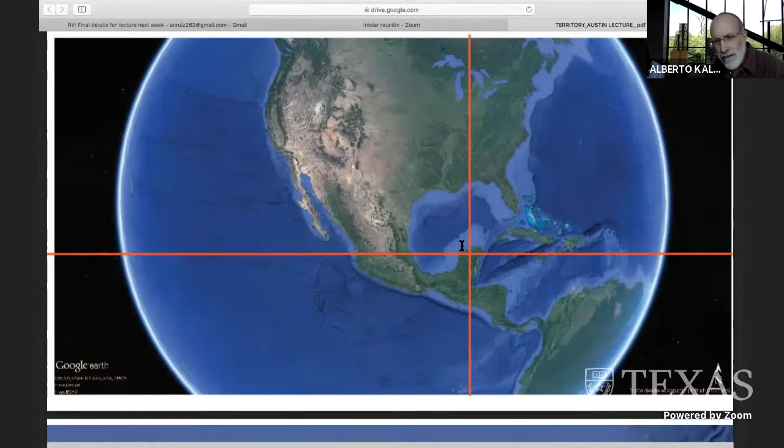So we're going to start with a project here in the Yucatan Peninsula. You know very well the territory because you are not far away from there, you're our closest neighbors, Texas. And you can see immediately by the colors of the image, you have the feeling of the territory. You can see, even though it's a very small image, where are the mountain ranges, where are the deserts, where are some rivers, even where the ocean is deeper, where there are tectonic faults in the planet. So we're going to approach the Yucatan Peninsula.

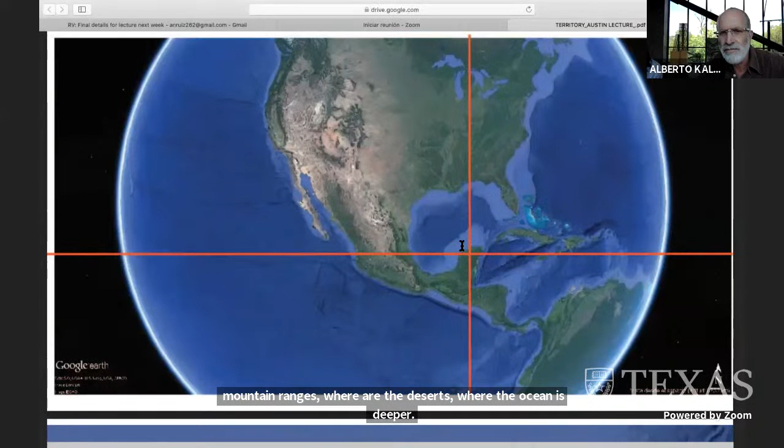How do we do that? Okay. We're going to start with a little project somewhere around here. We were commissioned to do a restoration of an old hacienda from the beginning of the 19th century.

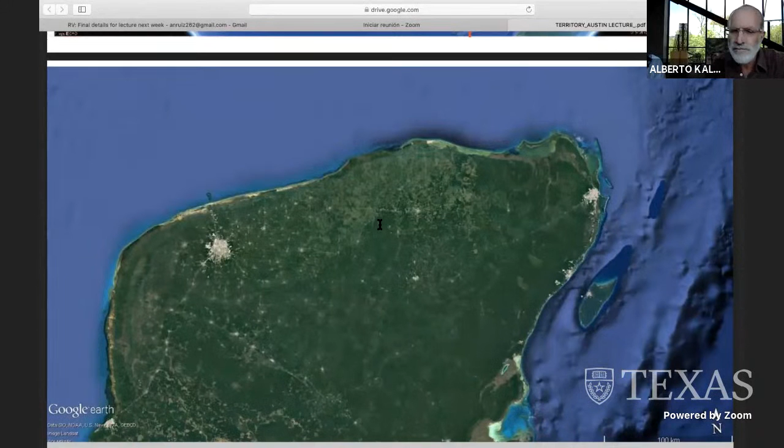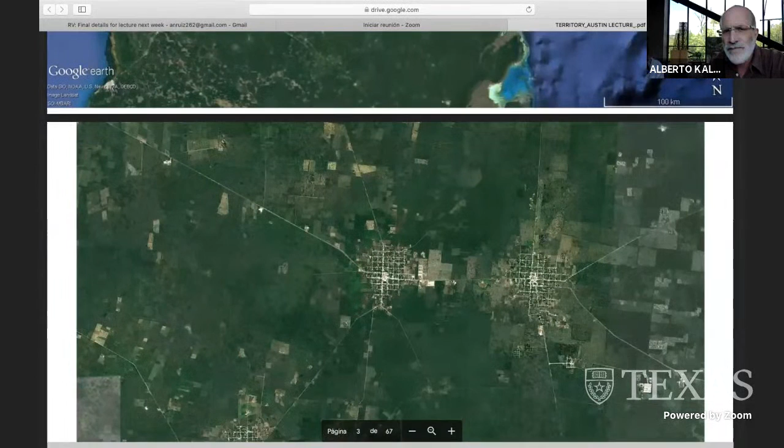Hey, where is that hacienda? Was it here? Vale, okay. Well, anyhow, by doing that hacienda, we discovered that the hacienda was abandoned for more or less 80 years, 60 years, and there were huge trees in the hacienda. But the rest of the landscape was devastated. There were no huge trees, there were like kind of abandoned agriculture areas.

All the inhabitants in the area thought that landscape was a low forest, not the high forest we imagine that somehow happened there years ago. So by detecting those huge trees, we realized that if those huge trees were there, probably that was the image of the peninsula long time ago. We did the research, and our observation was correct. It was a very powerful forest with huge trees, but very few were left.

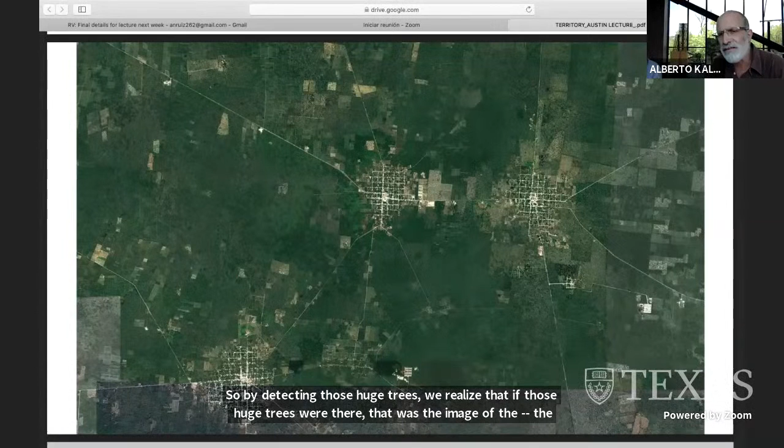So we thought that could very easily be restored. Even though 80% of the peninsula's big trees are gone, we can very easily recover them because the water table is not so deep. There is an enormous amount of water 10 meters below ground, and the conditions are given for the large jungle, for the large forest.

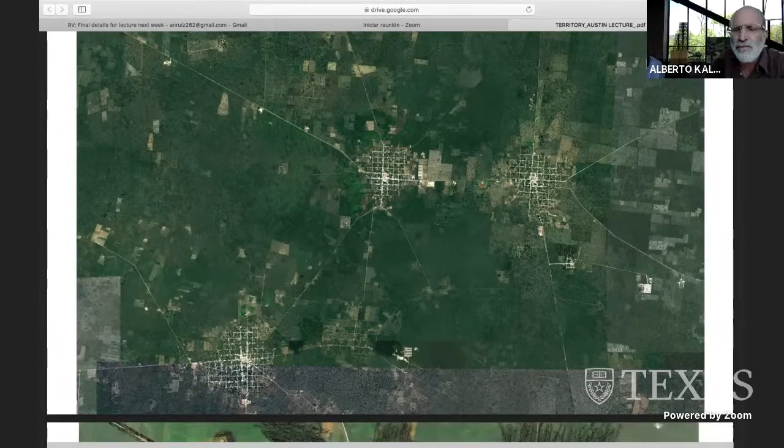So we started to design, to imagine first how to encapsulate the urban areas, how to protect them in order not to spread out. Something that we have seen in many parts of Europe: the cities are perfectly well defined. The limits between city and forest, or city and the working fields, the agricultural fields, are perfectly established.

That doesn't happen in Mexico, but that's a very important thing to do if we want to have a better world. We have to establish very strong limits to the urban development, but also strong limits to the agricultural areas. By doing agriculture more efficient and cities more efficient, we can reconnect the existing forest. We can rebuild or replant the forest of vast areas. Of course, here we did it very fast with a color pencil, thousands and thousands of square meters in 20 minutes, but it's something that can be done, and it has to be done.

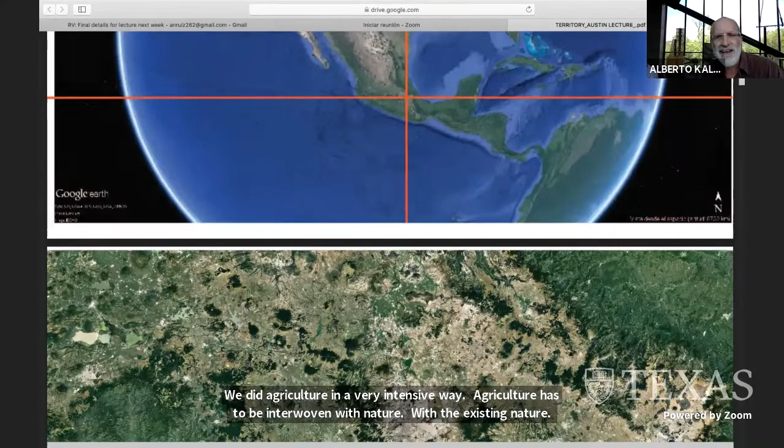If we move to the area of Mexico City, we can see here this is Mexico City, this is Puebla, this is Jalapa. But all this was a continuous forest from ocean to ocean, from the Gulf of Mexico to the Pacific Ocean. Along this range of mountains, there was a continuous forest that now is completely gone. We destroyed completely the forest. We destroyed all the lakes, we extinguished all the lakes. There was a huge lake in Mexico City, now it's gone. In Toluca Valley, it was full of water beds and lakes, a very complex system of lakes. Everything is gone. All the forest is gone.

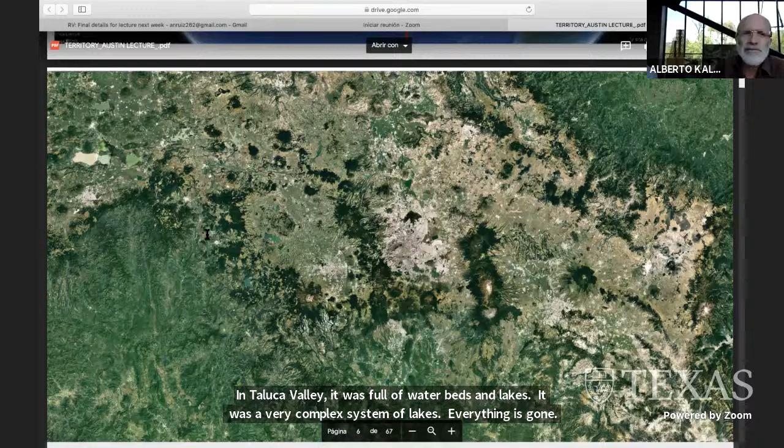Part of our task as architects, urbanists, planners, is to recreate, to redo all this devastation that we have done for centuries and centuries. In fact, in the 18th century, when Alexander von Humboldt visited America, he spent a few years traveling around.

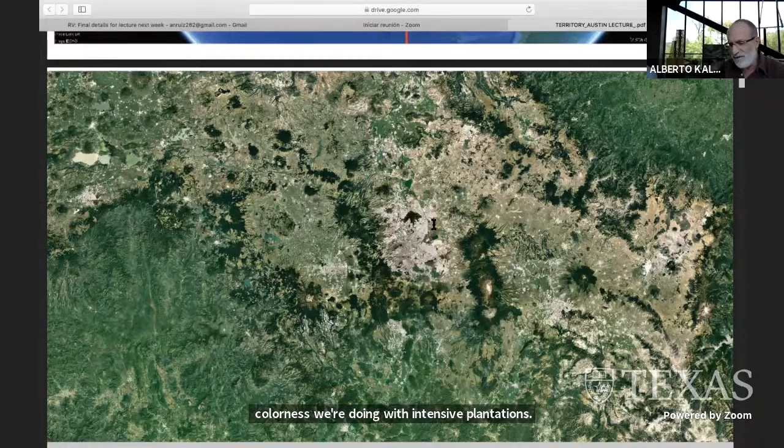He pointed out what the colonies were doing with intensive plantations. So instead of having agriculture for local consumption, the colonies did everything for global export. They used the land in a very intensive way, and they devastated it. They started the devastation, and that didn't stop until today.

Today in Mexico, we have a very retrograde government, no care whatsoever for the land, for the territory, but that's a very urgent work that has to be done.

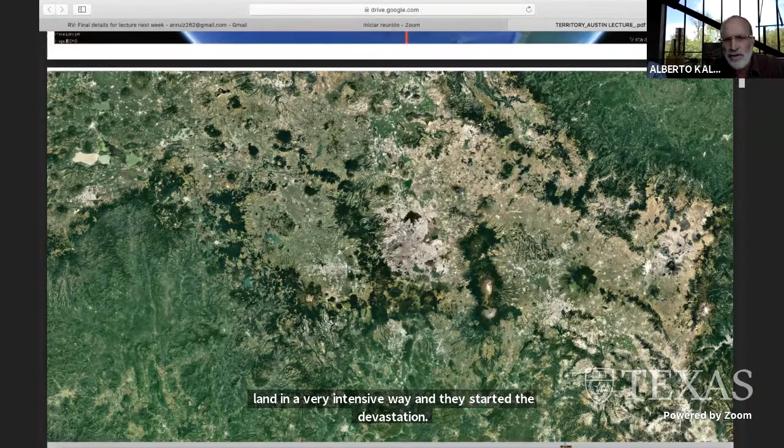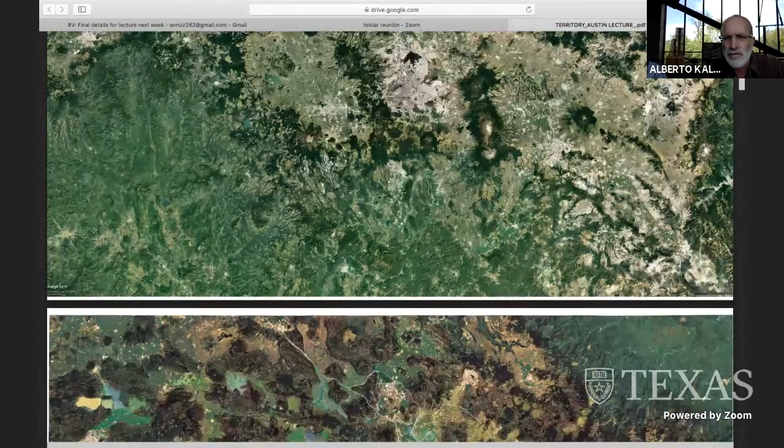So, as with the other image that we saw before, we did a series of interventions on these Google images. Here is an effort from the existing to the future vision, where all the forest is reconnected, all the agricultural areas are well-defined, and the urban areas are perfectly defined. The waterbeds, the water systems are recovered. It's a very important effort that has to be done in Mexico and in many parts of the world.

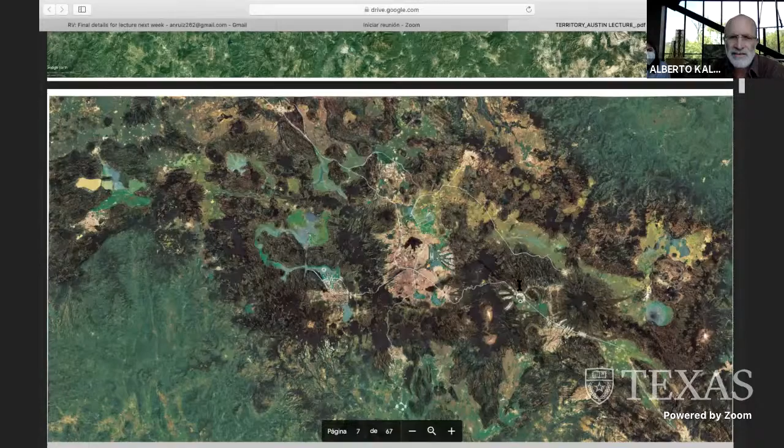Here we can see the huge Mexico City with the recovery of the areas of lakes that can still be recovered, the reforestation of all the ranges of mountains. The same thing happens in Toluca City, Toluca Valley, Puebla, Cuernavaca. It's an important task that architects have to get involved in.

If we zoom here, here is a zoom of the previous image. Here are the volcanoes at the east of the city, the cities around here. But here we see all the sprawling towns all over, and the deforestation. Not long ago, this forest was connected with this other forest, and now everything is devastated. Terrible devastation.

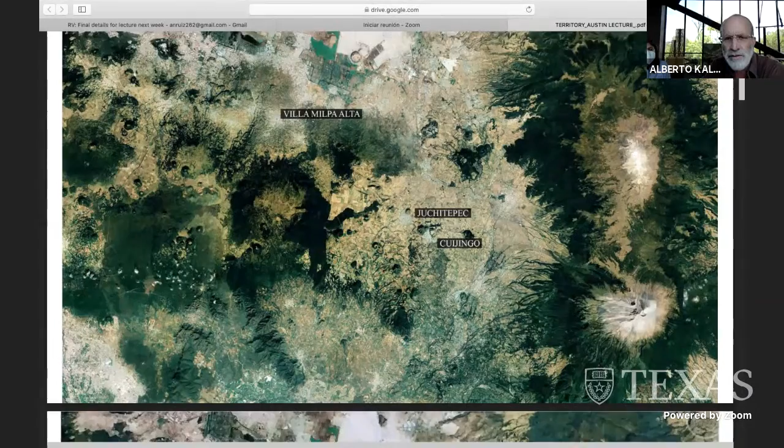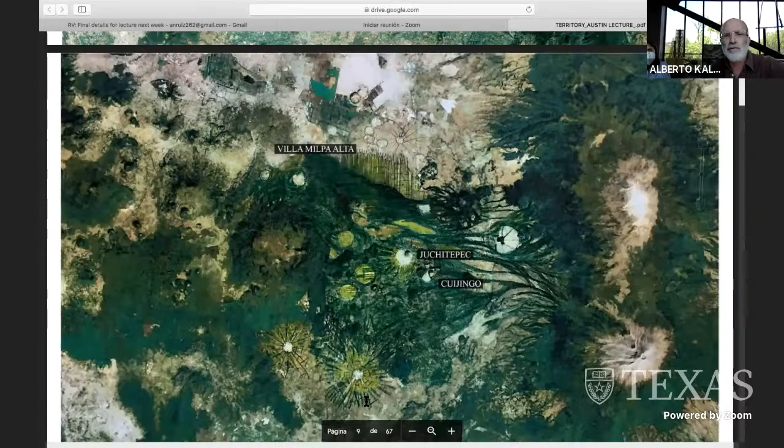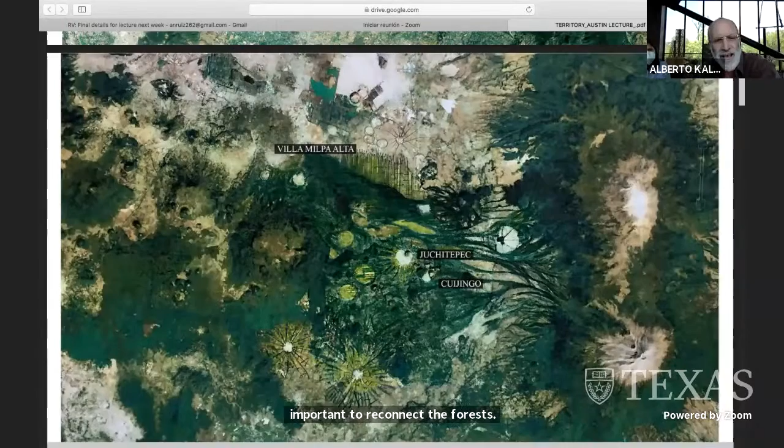So it's very important to reconnect the forest and to localize which are the optimal areas for agriculture and the optimal areas for urbanization. It's a task that has to be done.

We are not doing it, but we urge our authorities to do it.

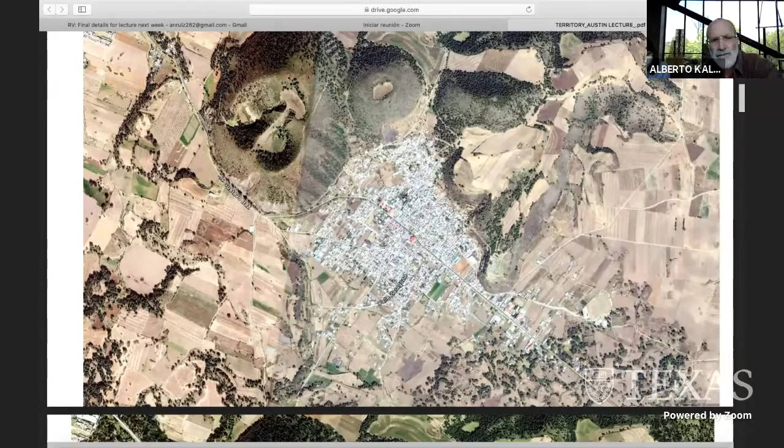But here we see how can we create barriers, urban architectural buildings, definite barriers like medieval towns, somehow to create a barrier between the urban area, the city, and the landscape, the forest, the natural landscape, and the agricultural areas, always surrounded by the forest and interconnected between them.

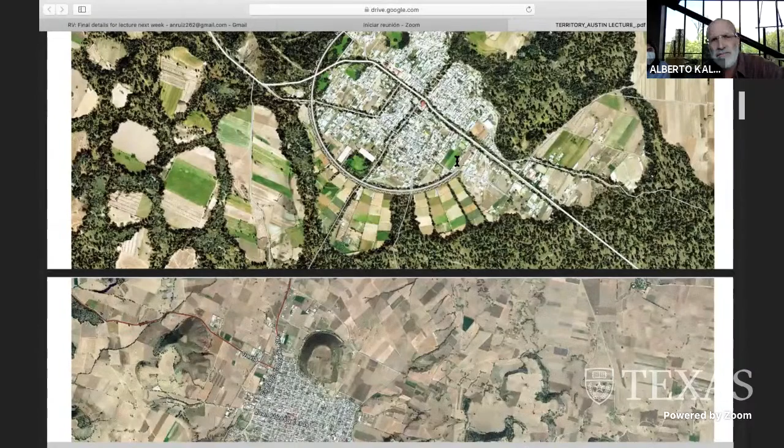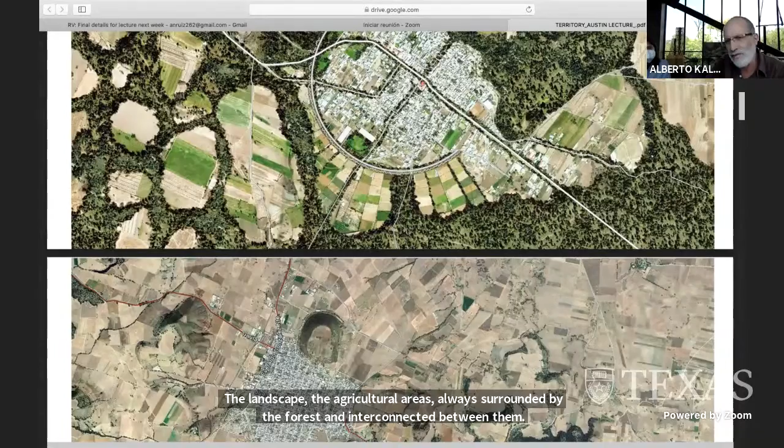Of course, how can we do this? Let's say 90% of the construction, at least in Mexico, is housing. So many of these interventions can be accomplished with housing. If we do good housing, smart housing, and if the housing has this urban vision, we can do both.

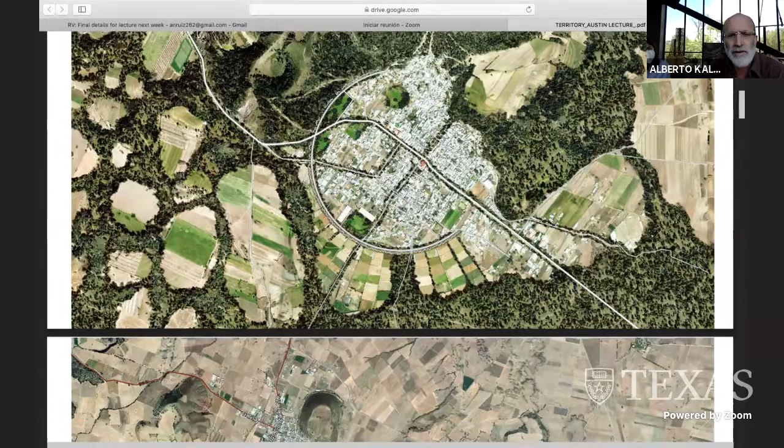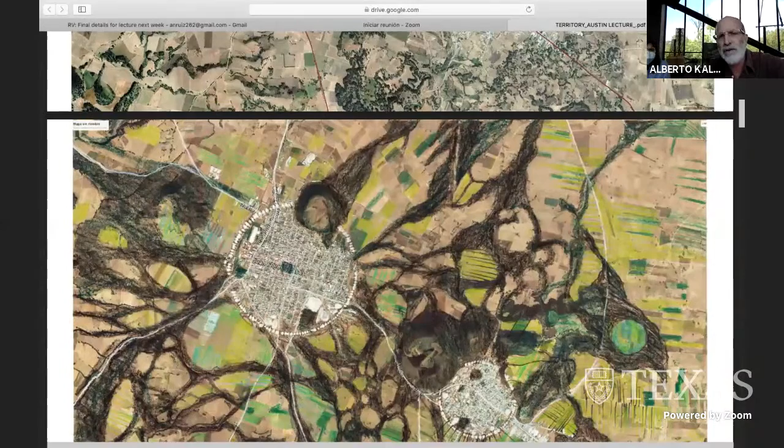We can do urbanism and do housing at the same time. Here we see another example of the same, how we can do, of course, housing and many other functions that the city needs in order to reconnect all these natural parks.

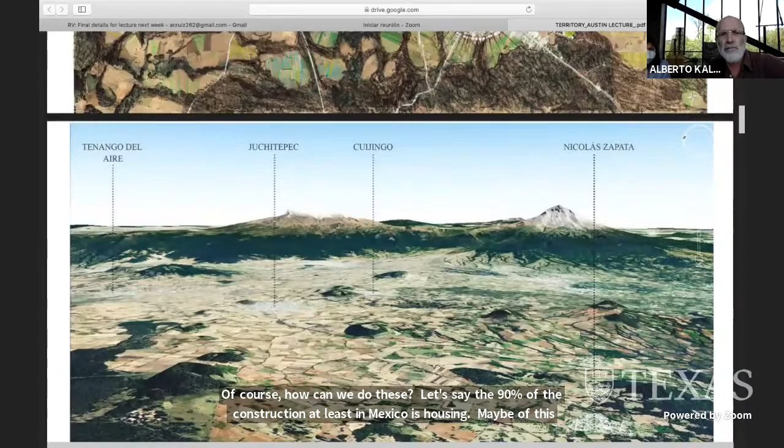Here we see this sprawling, complete devastation, and the reconnection of the areas.

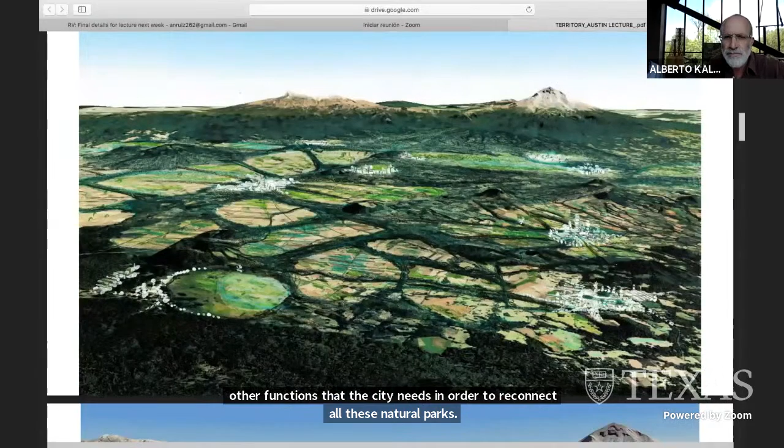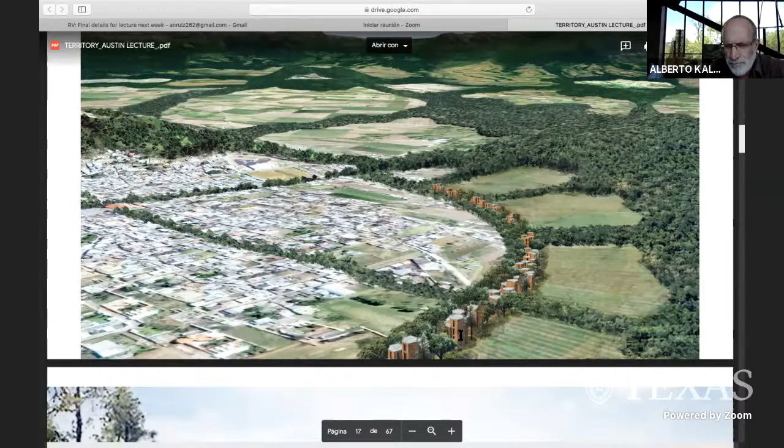Here we see with more detail, we designed a housing prototype, an additive housing prototype that could be built like a last barrier between the urban area and the agricultural and natural areas. We thought of a scheme that could be built individually or collectively.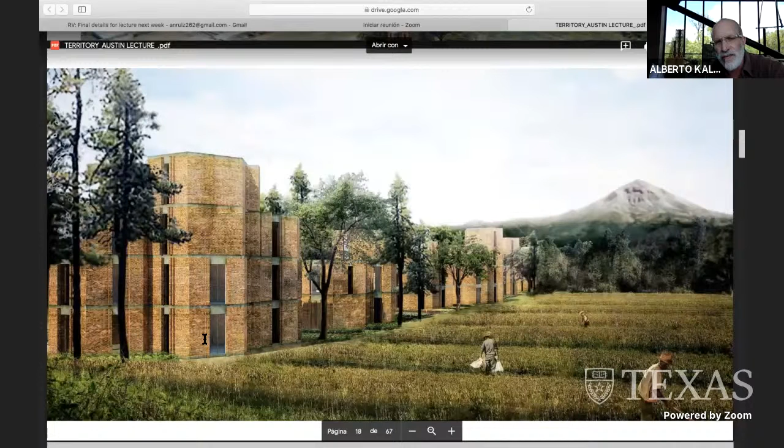Here we see in a closer vision, we decided to do a prototype, very small in its footprint. In this case it's around 20 to 26 square meters footprint. And depending on the income of the family, they could have 2, 3, 4, or 5 levels.

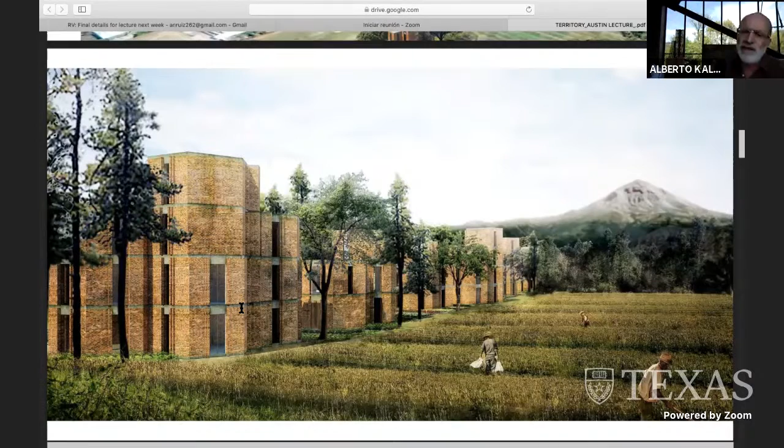And this prototype could, with variations, start creating this last barrier between city and forest, or city and agricultural fields.

About the plan, it's a system of hexagons interconnected, a grid of hexagons. We found that the hexagon is like in a bee, like the bee hive. The perimeter for the area that it creates is much more efficient than a square, or of course than a rectangle.

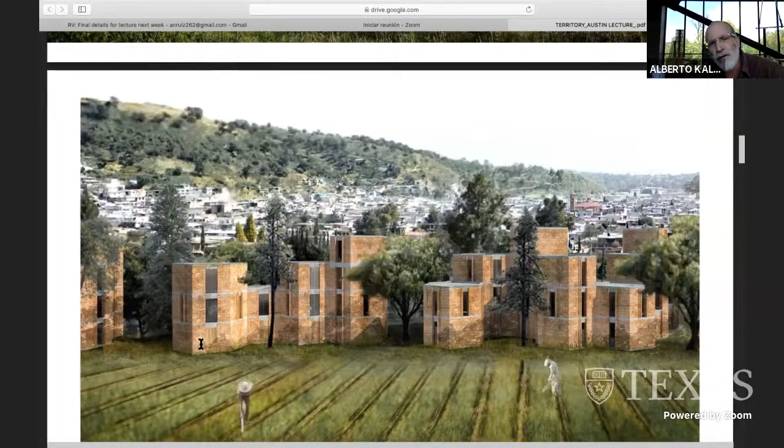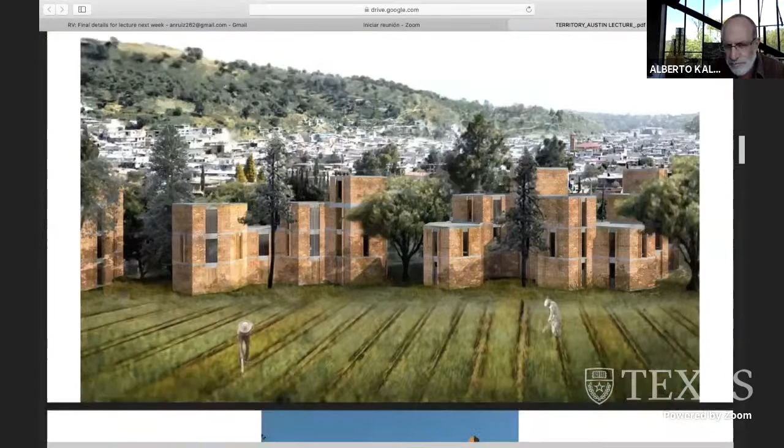And also from the seismic point of view, for earthquakes, it's a much more efficient structure, in how it interlocks one with the other. It creates a very strong structure that could afford horizontal strengths, could receive very strong horizontal forces.

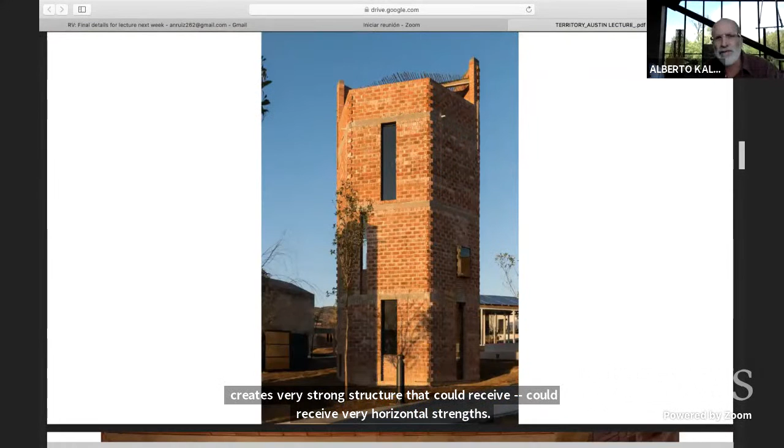We had the chance of building one prototype. This is the first prototype that we built. We did it for a housing exhibit where, in an area, they invited 25 different architects to do 25 different prototypes.

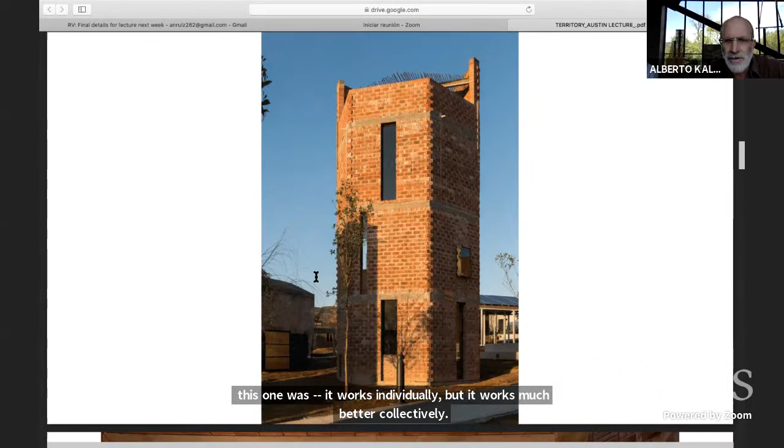We thought that this one works individually, but it works much better collectively. So we left the corners like that to be connected with the next one. It's a very, very simple structure where...

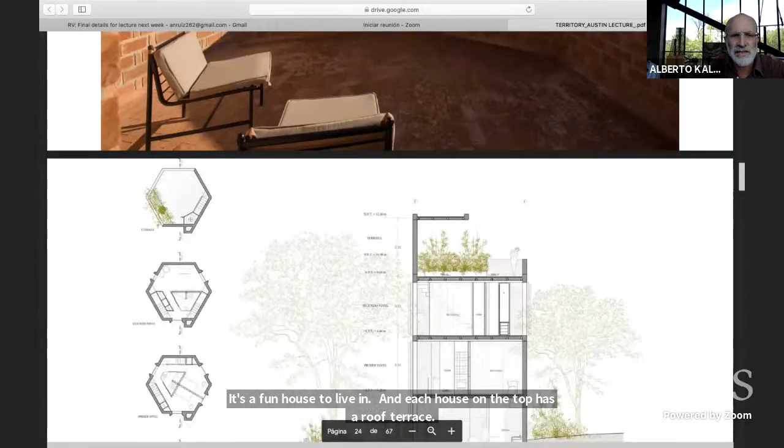I think it's a fun house to live in, and each house on top has a roof terrace. So these houses can be additive, can be added to create this last barrier between city and natural fields, natural forest. Here are the plans - it's a very, very simple house with the staircase spinning around.

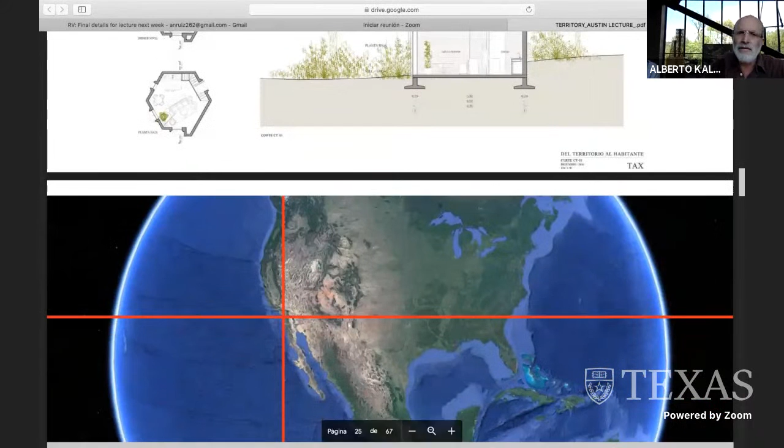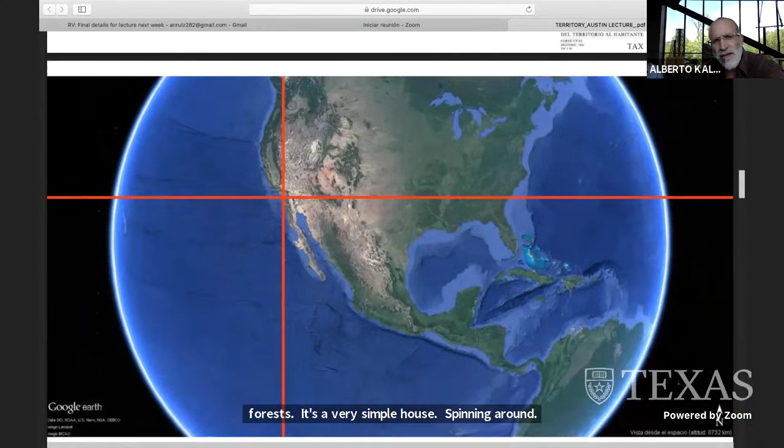Then we're going to move to this other area. This is Tijuana, close to the border, close to San Diego City. It's a very arid zone and very badly developed, very badly designed. Everything sprawls all over.

And with these terrible housing complexes, whatever is left of the landscape is flattened, and they put concrete on top, and very wide streets for parking, and these housing blocks which are absolutely terrible.

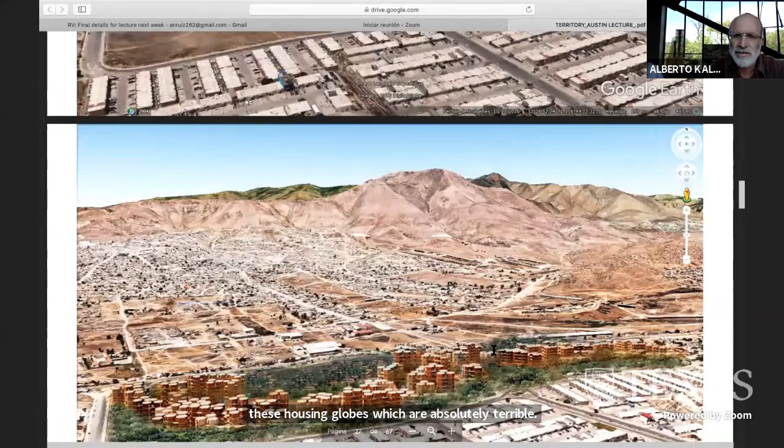So we were commissioned to work on this plot, and just by changing the concept of individual houses to collective houses, we changed dramatically the footprint on the land. Here, if you see in the existing layout, they occupy the complete area with streets and houses. Here we have a footprint of less than 10%.

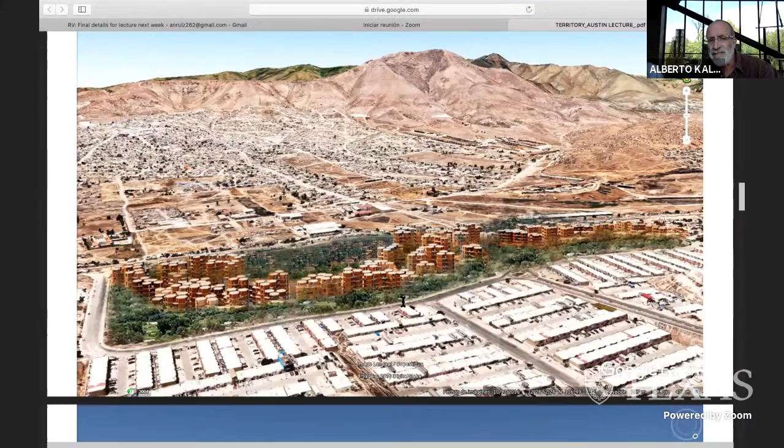By changing this little concept in the mind of the developer and the user—instead of each house having its own car parked in front—we can have vertical development of 2, 3, 4 story heights, and completely change the landscape. We can create fantastic parks, and since we need a lot of water to live, instead of sending water to the sewerage and away miles from here, we can reuse that water to create parks surrounding our housing developments.

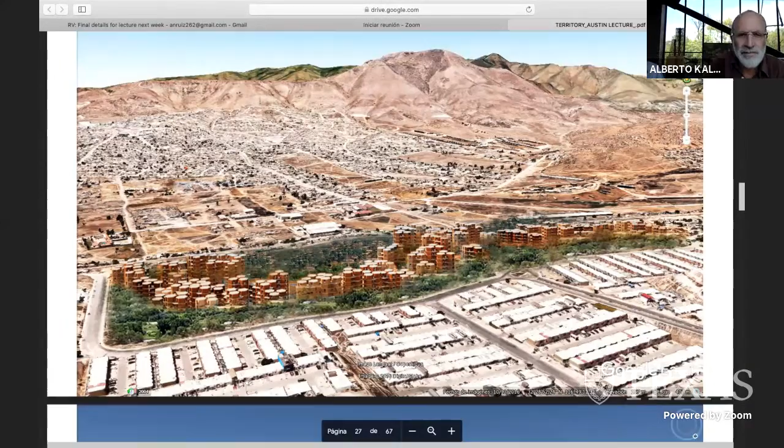In this exercise we are trying to do, the topography gives us a clue how to intervene, how not to make flat platforms. You put a bulldozer in, create platforms, devastate everything, and build concrete streets and concrete blocks on top. But it's important to work with the landscape, to read it and work with it.

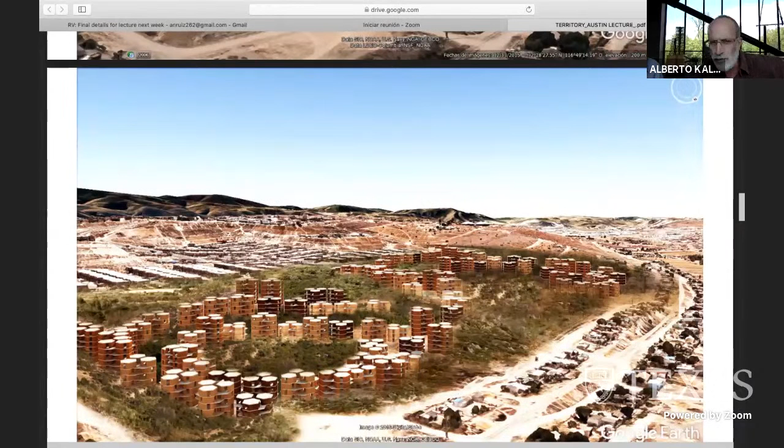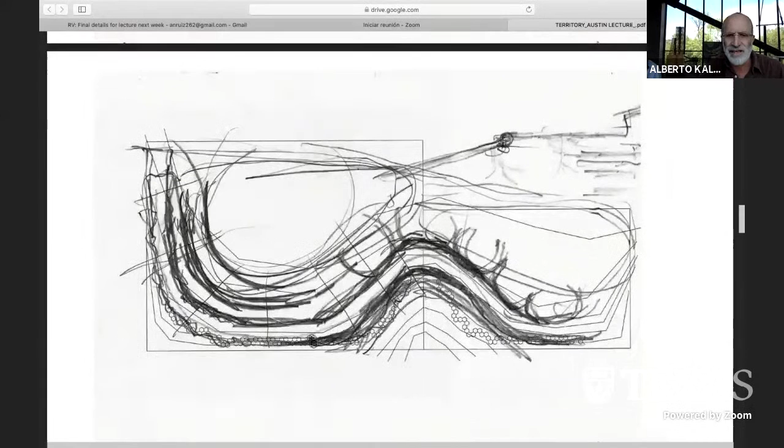So here the houses respond to the topography, and the streets respond to the topography. We don't move the earth around; we work with the topographic lines of the site. By piling up the houses, we have 90% of the site open for recreation and parks.

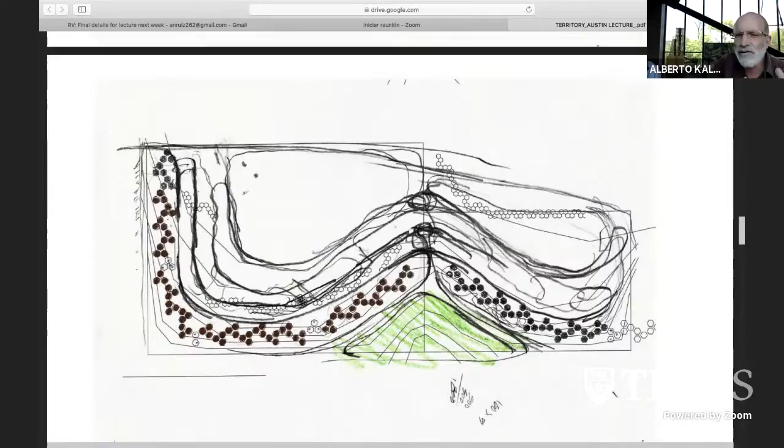Here we went again with these hexagon patterns, but in this case we shifted the apartments per floor, and they are still very efficient. Besides being efficient structurally and constructively, they are less monotonous. Another problem of social housing is monotony, and to break it, the hexagon configurations are very useful.

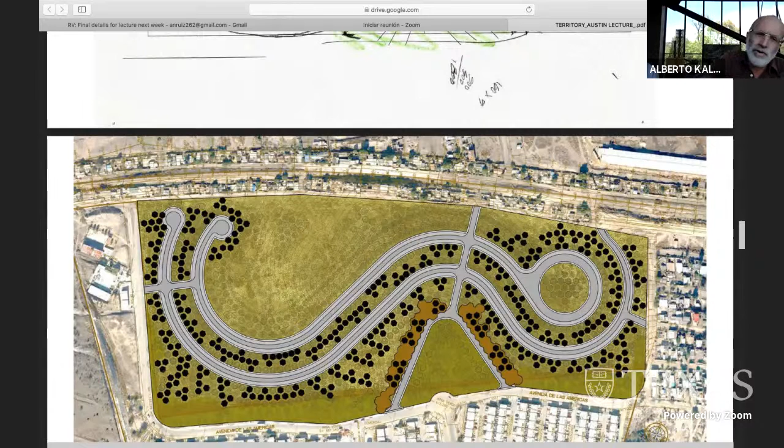So we broke the monotony of the housing complex by using this pattern, but also by changing the heights of the units. There are buildings of 3-story, 4-story, and 5-story heights. That way we break the monotony of the complex.

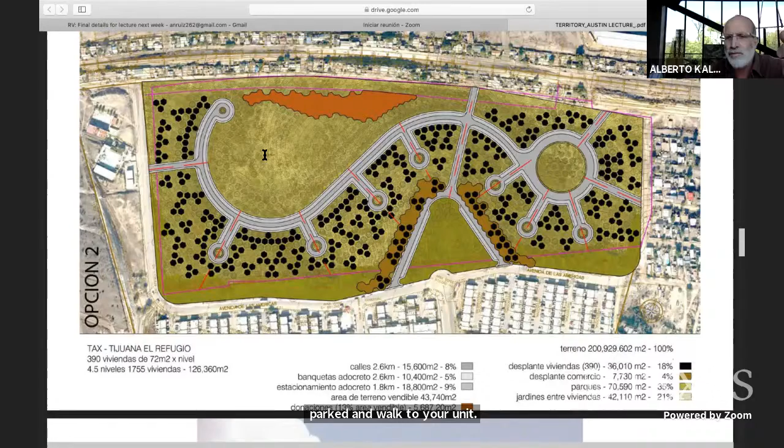There we have the numbers, and the buildings themselves are very simple. But by changing the height and using this hexagonal pattern, the monotony of the 2,000 units disappeared. Also the idea of using different colors of brick—here we can see one of the cul-de-sacs where you can enter 3-4 different apartment buildings.

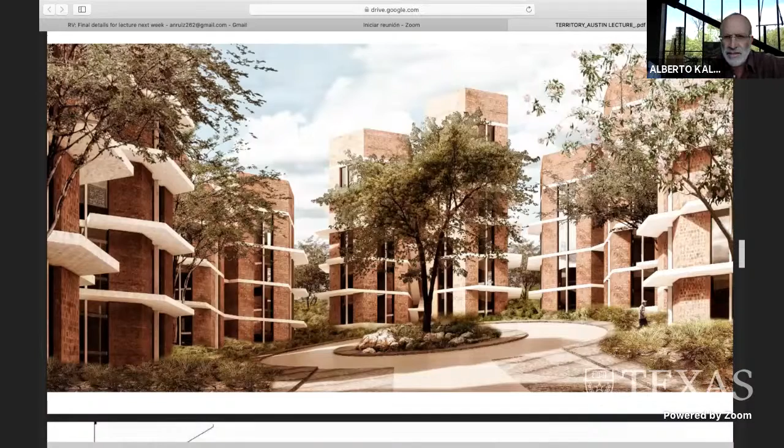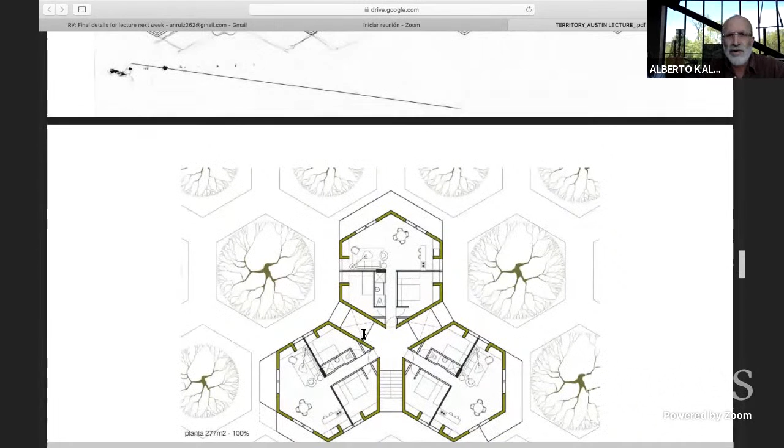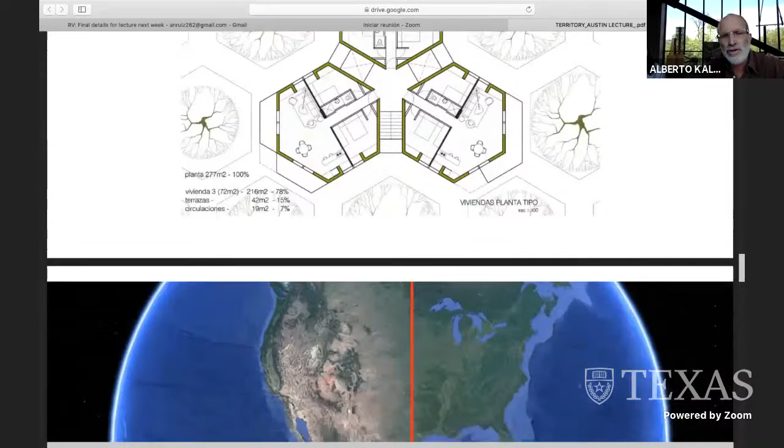That's a little bit the idea of the plan. It can be solved in a very easy manner with a nice living space, terraces, and the vertical circulation placed at the junction of the different apartments.

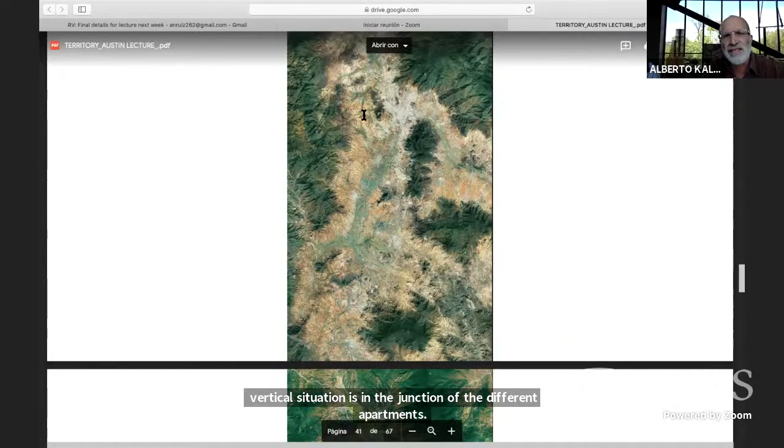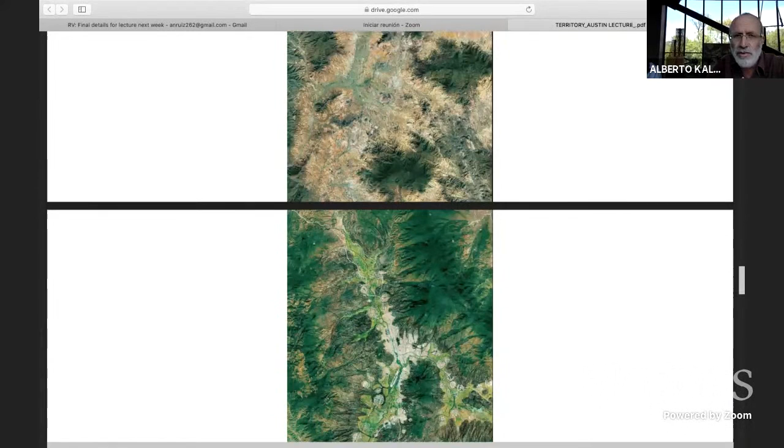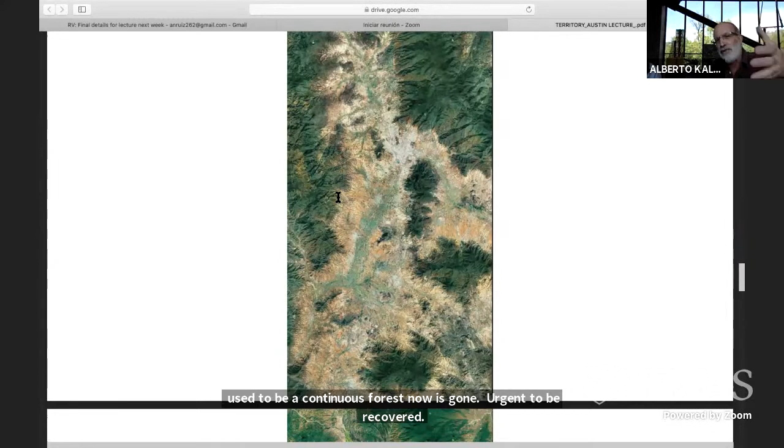Here we go back to Oaxaca. I'll pass this fast, but here is Oaxaca city, with many little towns around, and all these mountains that used to be continuous forest are now gone and urgently need to be recovered. The other problem is that once the forest is gone, water doesn't infiltrate the aquifer, because each tree retains water when it rains and brings it down into the aquifer.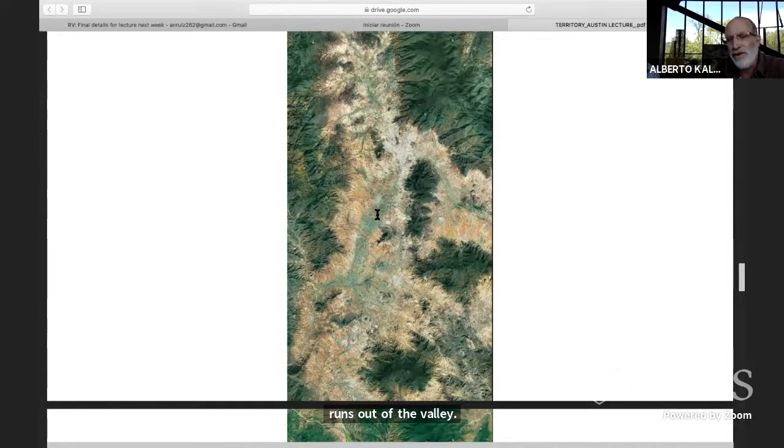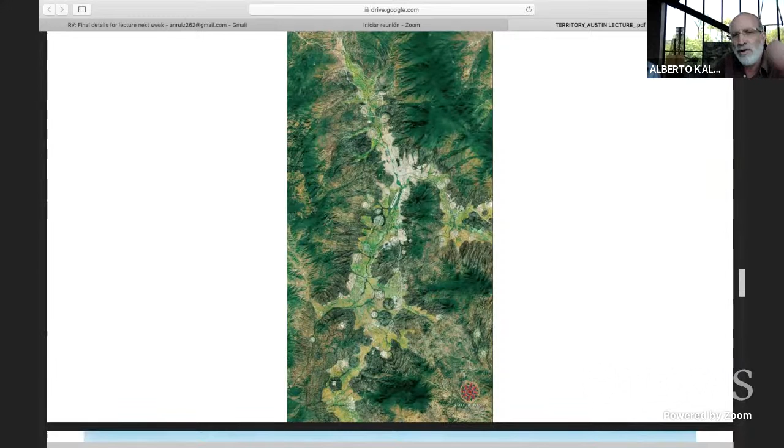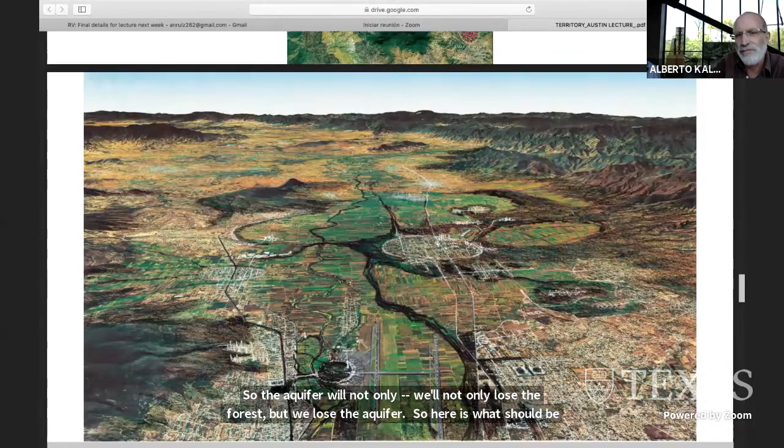Once the forest is gone, water runs on the surface, creates terrible erosion, and runs out of the valley. So we lose not only the forest but the aquifer, which is our water reservoir. So here is what should happen: containment of the urban areas, containment of the agricultural fields, reconnection of the forest, and sanitation of the rivers.

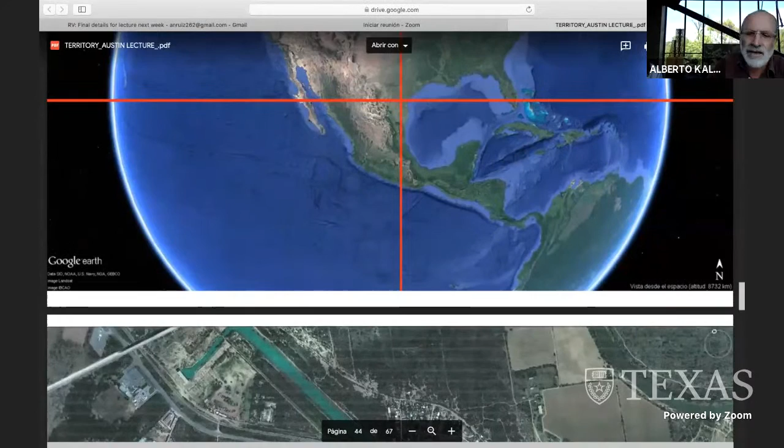Another example of housing as a solution for urban problems: we did this project just by the Rio Bravo, the river that divides Mexico from Texas. We were commissioned to do this design—it never happened—but once again, how can we put together the housing units in order to free up area for green spaces?

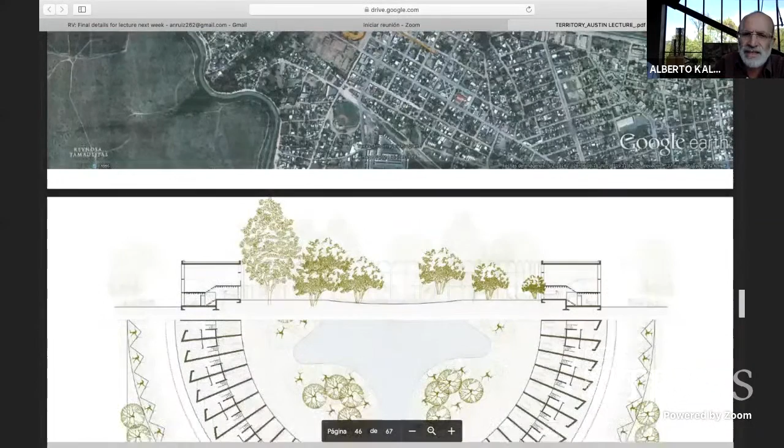In this case, we thought it was a requirement that each house should have a car in front. But if we left the cars on the perimeter, it was a good way of doing only one street, with all the houses attached in row housing, but placed along the perimeter. As you know, the maximum area of any figure is at the perimeter.

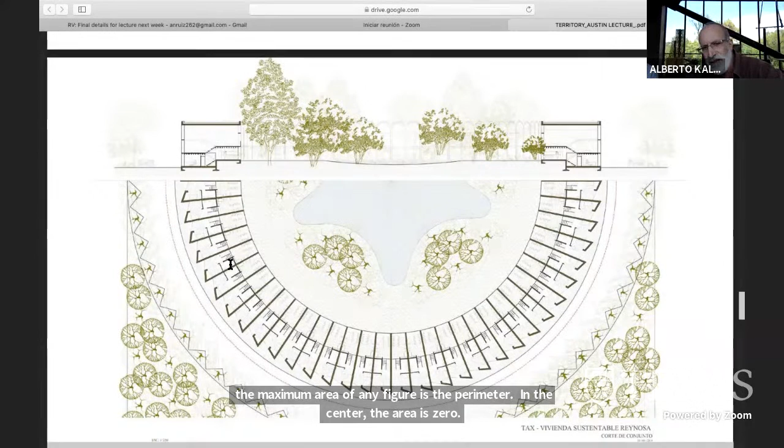In the center, very center, the area is 0. As you go out, the area increases, and the maximum area is in the perimeter. So by doing this, we can have very intensive construction of housing, but in a way somehow leave the center of the site untouched, like a natural area for all the units.

Each unit is connected visually to this central green area. And once again, the units are very simple. Another important issue is the width of the unit,

which is the minimum. We have to go to the minimum width for a unit. By doing that, we have less street per unit. We do much more efficient streets. So we can have more units sharing a street if we do very narrow units.

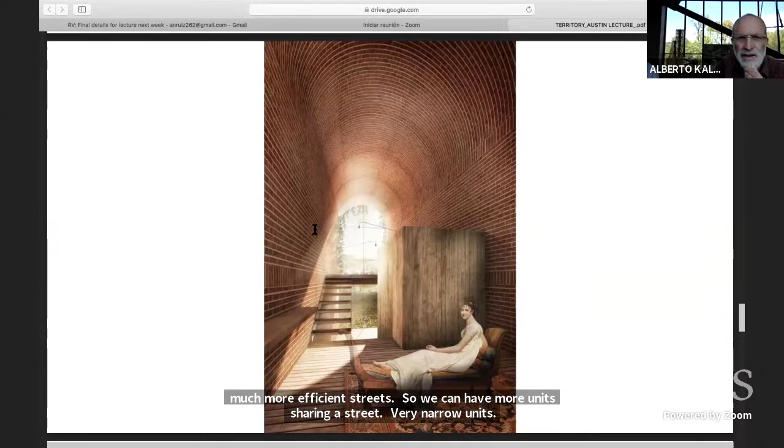So there are many good examples. Le Corbusier did it in Marseille. Previous to Le Corbusier, there are many examples of working row houses in England where they go from 3 meters to 3.60 width. And that's enough to have a very pleasant house and making the urban space much more efficient.

It's as simple as this. If you have a house of 3 meters front, it needs 3 meters of street. If you give the house 6 meters, it's 6 meters of street, you double it. So if you put half front, half infrastructure - street, pipes, etc.

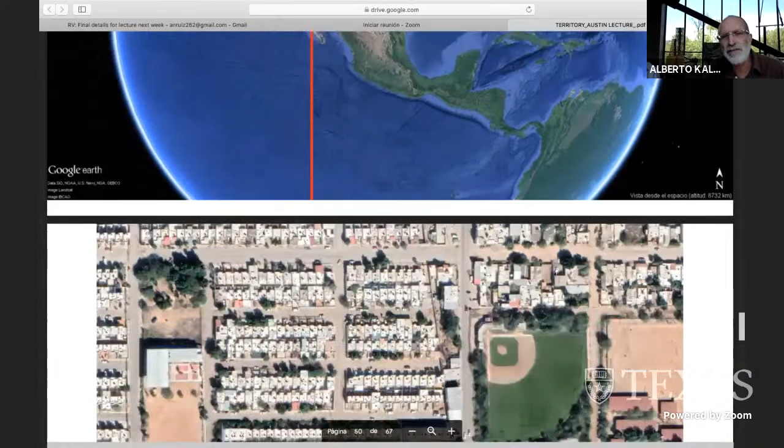And this is an example that we succeeded in building. Here, the streets were already there, so we changed the rule. Instead of having houses of 6 meters of front, 6.5, 7, as existed, we did houses of 3 meters front. By doing that, we were able to put more houses, narrower streets, deeper lots.

And by doing this, we succeeded in creating a more green environment. You will see in the next photos - narrower lots, deeper lots, with a little garden in the back and a green street in the front.

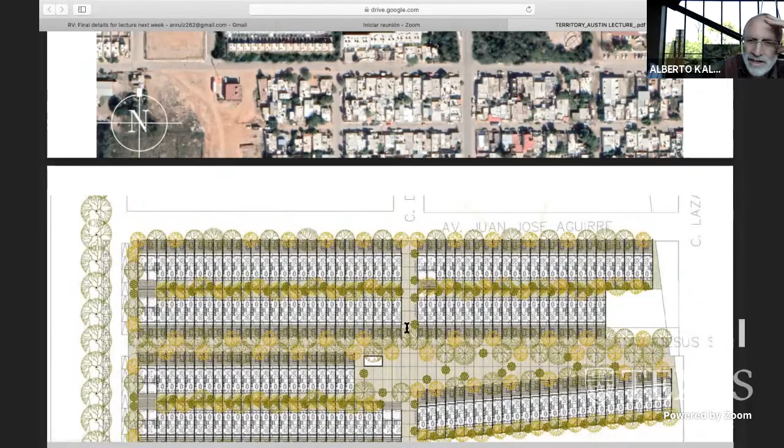It's very important to have trees in the streets and trees in the back. Each house, even though they are very tiny little houses, has two big trees, one in the front and one in the back. And that's a must.

So even though the house is 3.5 meters wide, it has several conditions which make the house very livable, very enjoyable. First, have very generous heights, which is very important. It's in half levels - we did other units with one more floor, but always in mid levels. So everything connects one floor with the other. There is a continuity between the first floor with the second, with the third, with the fourth.

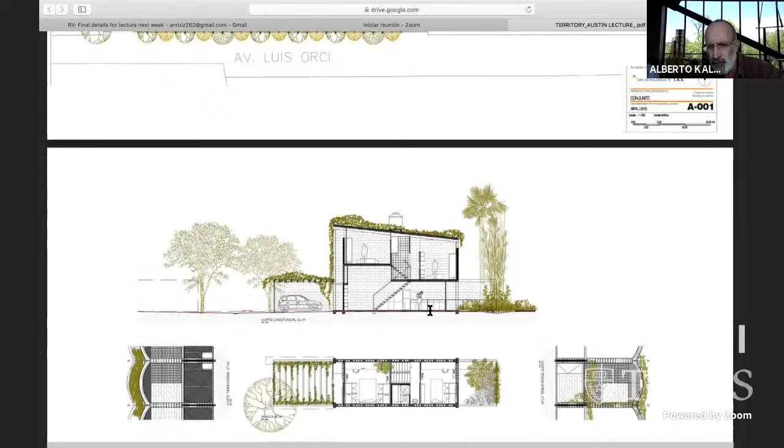That's very important. Cross ventilation is important. The greenery around is important for environmental issues, temperature, protection from the sun, of course, sun protection.